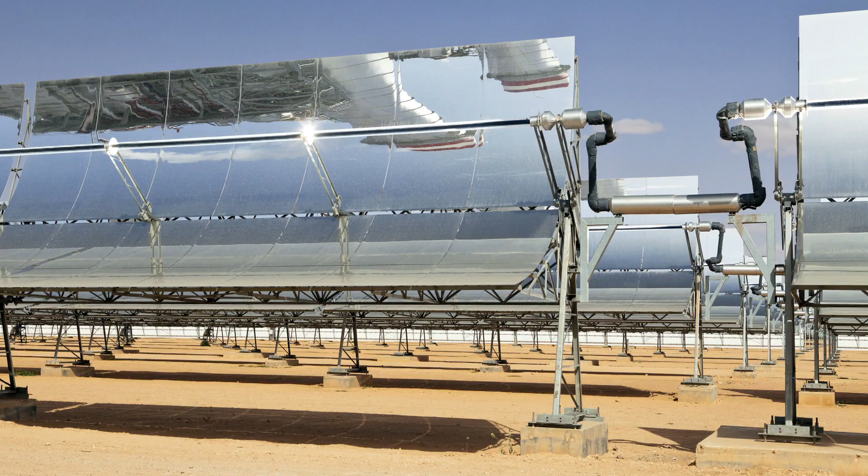The North African countries are economically emerging nations. Dynamic population growth associated with rising living standards and higher incomes has led to a significant increase in energy needs. Most electricity is currently produced from coal and gas, but solar power is set to become increasingly important in the future. In addition to the large-scale solar power stations envisaged in the Moroccan Solar Power Plan, in this region of plentiful solar resources, a multitude of small solar installations will also have a major role to play.

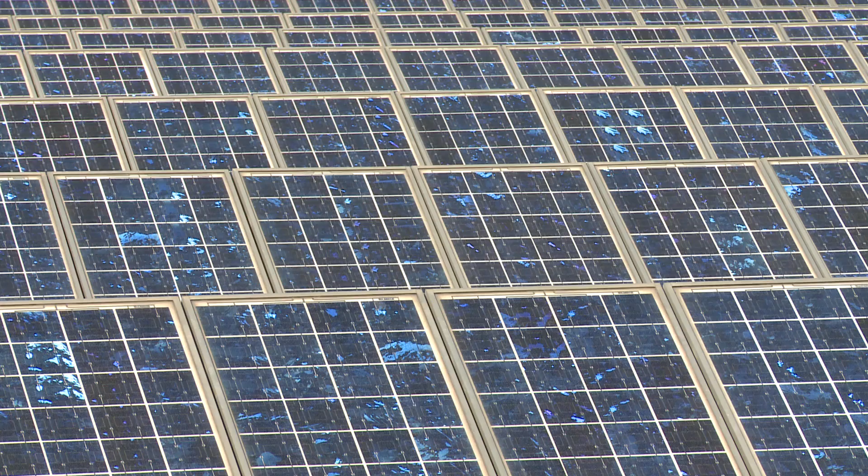Households, businesses and public authorities will be able to produce their own green electricity thanks to photovoltaic systems installed on their buildings. Many people already have solar thermal installations to produce hot water, as can be seen here in Rabat, Morocco's capital. And the government is now paving the way for harnessing the potential offered by photovoltaic systems. The whole country can benefit from this. Solar power can contribute to reducing costly electricity and fossil energy imports and give Moroccan installers and other businesses the opportunity to invest in promising technology which will create jobs nationally.

ADERE, the Moroccan Agency for the Development of Renewable Energy and Energy Efficiency, is tasked with promoting renewable energy, energy saving and energy efficiency in the Kingdom of Morocco. One of the activities that we carry out here, which is very important to us, is to show that the technology exists and that it can be used in Morocco. All those involved in construction, from the architect to the property developer, can come and see for themselves here on the roof of the ADERE office that these systems work and that the technology is increasingly reliable, very reliable in fact.

Solar power is a key asset in our quest for energy independence, environmental protection and energy self-sufficiency. And today's focus on buildings can be widened in the future to embrace many other applications. This film will take us through the installation of a photovoltaic system by the company AS Solar, showing the different mounting systems available. This installation was financed under the Solar Roofs program implemented by the German energy agency Deutsche Energieagentur, DENA.

Morocco is a country with plentiful solar resources and a very long coastline. Because of its proximity to the sea, the country's capital Rabat is often buffeted by strong winds. This factor must be taken into account when mounting solar power systems and, of course, at the planning stage. Thanks to a modern software application, the whole solar power system can be sized and optimized down to the last detail. In no time at all, the components are all ready to be transported to the installation site.

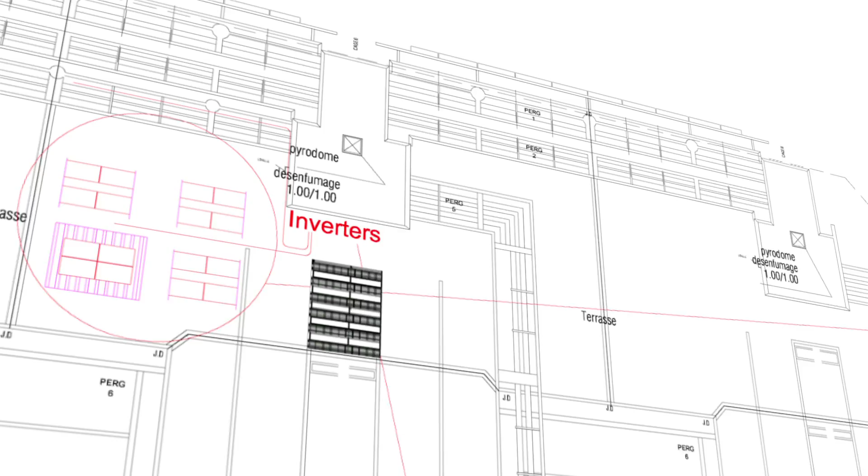In this case, the installation site is the new headquarters building of ADERE, the Moroccan Agency for the Development of Renewable Energy and Energy Efficiency in Rabat. The administration building has large areas available on its roof and walls, making it the ideal place for the demonstration of different types of photovoltaic modules and mounting systems. For almost every type of rooftop mounting, there is a specific system that ensures the safe and professional installation of all these valuable PV modules.

Given that a high-quality PV system has an expected lifetime of over 30 years, at the planning stage, it's essential to make sure that all the elements will be able to withstand climatic and environmental conditions for that length of time. It all starts with the mounting system. Skimping on this item to save money is the wrong way to go. In fact, compared with the cost of the modules and the inverters, the cost of the support structure is minimal.

The main challenge here is to design a high-quality static support structure capable of withstanding the violent winds that can affect the region. When planning a system that has to last 30 years, weatherproofing is an important factor to be taken into account. The parts used in most mounting systems are made of aluminium and stainless steel. If plastic parts are used, they must be especially resistant to UV radiation.

The type of roof where roof mount systems are most commonly installed in Morocco, both on individual dwellings or blocks of flats, is the concrete flat roof. Let's now look at 3 examples of modern photovoltaic systems adapted for placement on flat roofs.

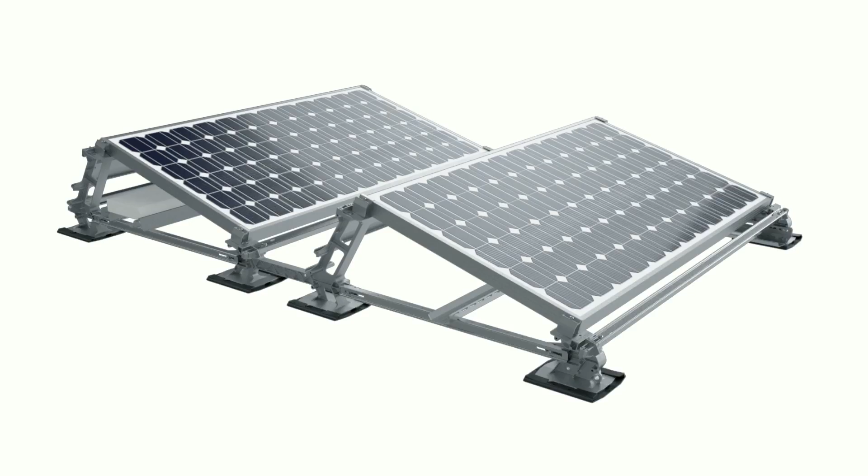Particularly noteworthy are the aerodynamically optimized photovoltaic systems specifically designed for flat roofs. They don't need to be secured to the roof, and ballasting requirements are low. Generally, wind loads acting on the surface of the modules generate uplift forces. In ordinary installations, this pressure has to be countered by significant ballasting or mechanical attachment to the roof, which means penetrating the roof covering.

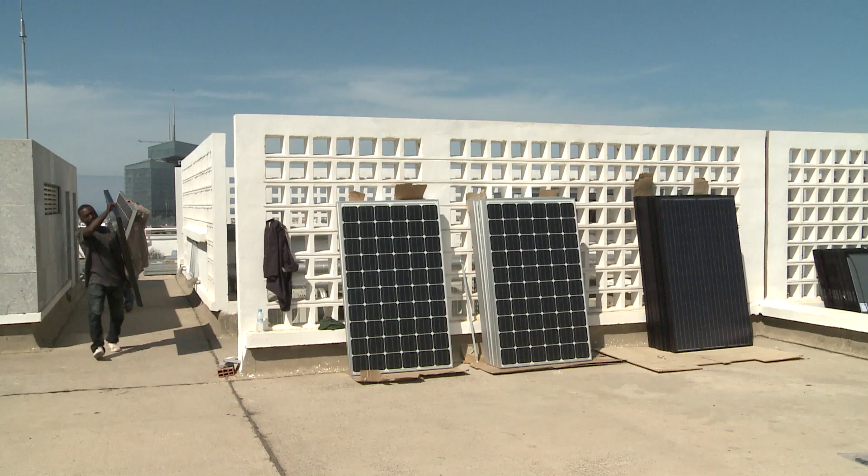These systems, which have been in use in Germany for a long time now, are based on an aerodynamic principle similar to that employed by a car spoiler, the flap fitted to the back of a car to reduce lift. It's important to follow the manual closely step by step. The solar modules must be moved and mounted carefully. Care must also be taken not to step on the solar modules or place or drop anything on them.

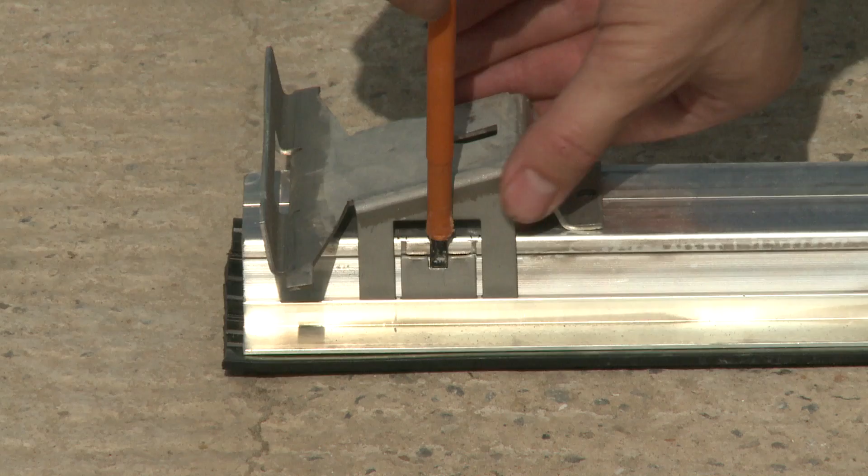Here is the Schletter AluGrid mounting system. First, the mounting rails are put in position. The fastening clamps onto which the modules will be fitted are simply snapped into place on the base rails. One of the advantages of the AluGrid mounting system is that installation is virtually tool-free. The special fastening clamps are secured by firmly clicking them into place and can easily be removed with a screwdriver should they need to be moved.

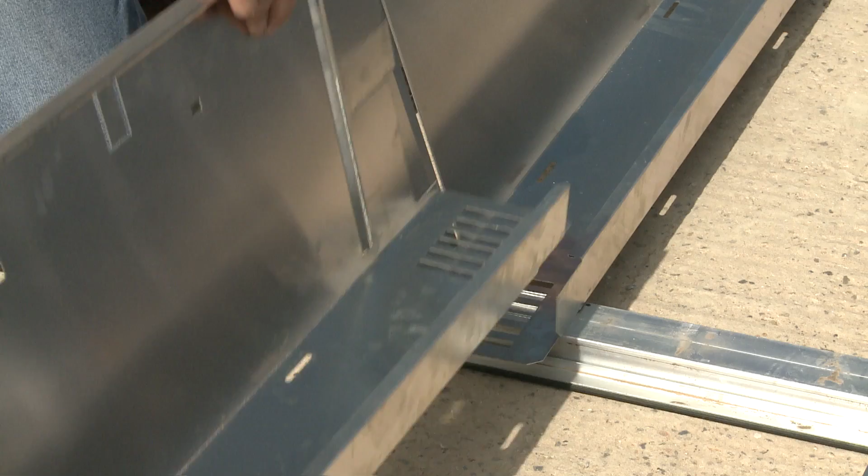The fastening clamps and cross rails, which can be adjusted individually along the base rails, are positioned at intervals calculated beforehand to avoid module shading. The wind deflector is then fitted to the back of the rack and is securely attached to the rails using fastening clamps. The module can be tilted by either 10 degrees or 15 degrees. The wind deflector sheets can be joined to each other using connector plates.

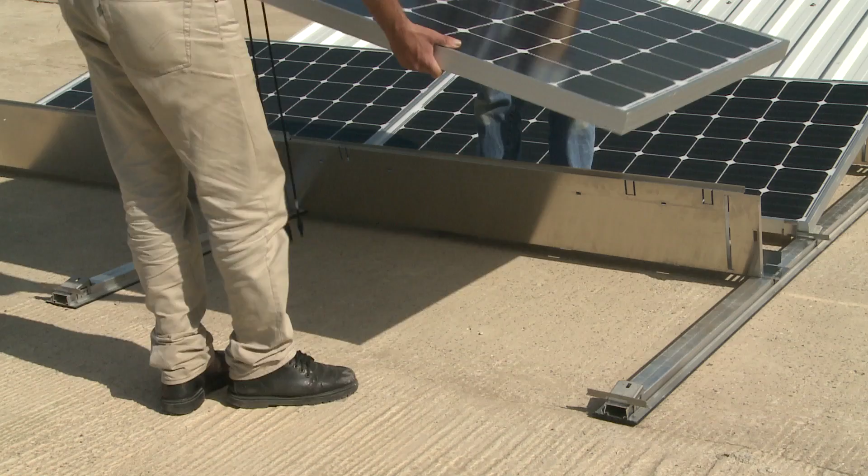The lower edge of the solar modules is placed on the cross rails and securely attached using fastening clamps. The same procedure is repeated for the top edge, which is secured to the wind deflector. Lastly, the metal tabs are bent around the module frame so that the wind deflector is secured in place to achieve the spoiler effect mentioned above. The special clamping pliers supplied with the kit must be used to tighten the module fastening clamps.

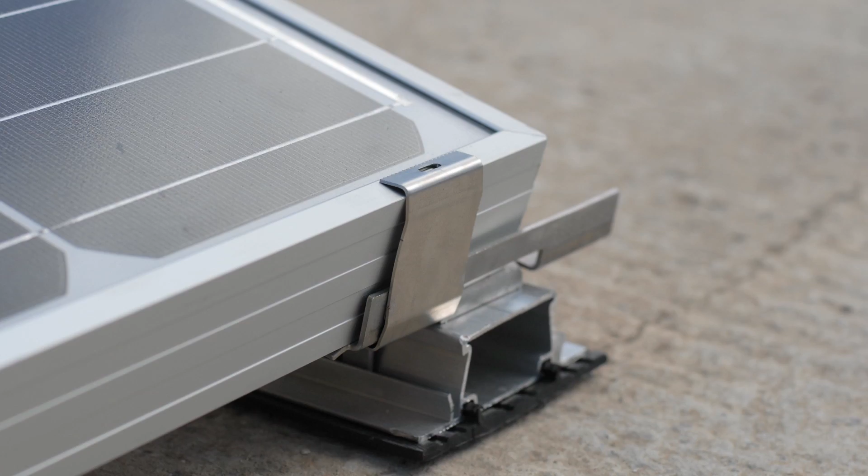The cable clips are fastened to the wind deflectors. The stones supplied with the kit are then placed in position as shown in the ballast plan.

The MSP FR mounting system developed by the company Hilti is also an aerodynamically optimized solution in which ballasting requirements to reliably secure the system are low. The slightly raised structure with a wide base has the advantage of permitting generous airflow under the modules to dissipate heat and of preventing the accumulation of water in the event of heavy rain.

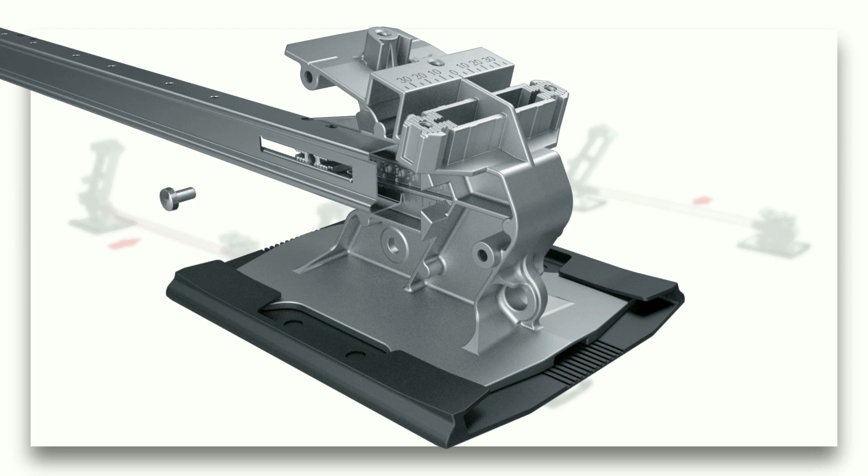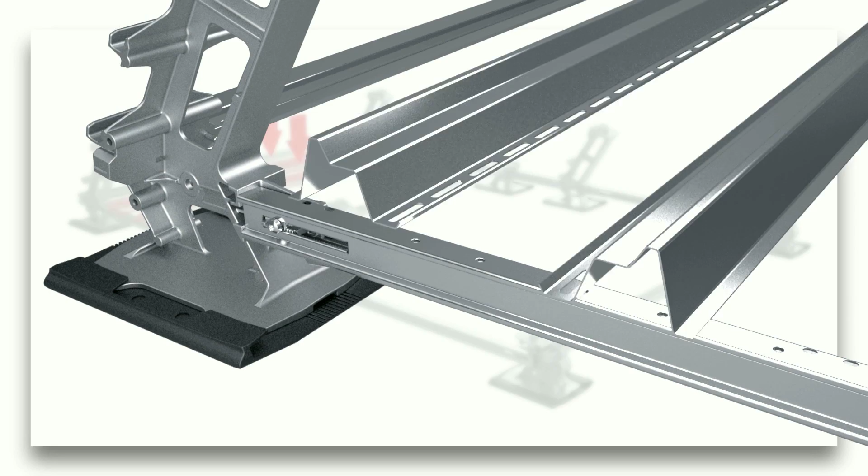The first step, as always, is to position all the parts on the rooftop and screw them together. The rails supplied are secured to the feet using the appropriate screws. It's important to always use the screws specifically indicated for each part as set out in the manufacturer's manual. All screws must be tightly fastened. During this assembly process, it's important to ensure that the feet and connectors are correctly spaced as shown in the instructions. Along with the standard rails, ballast trays are also fitted.

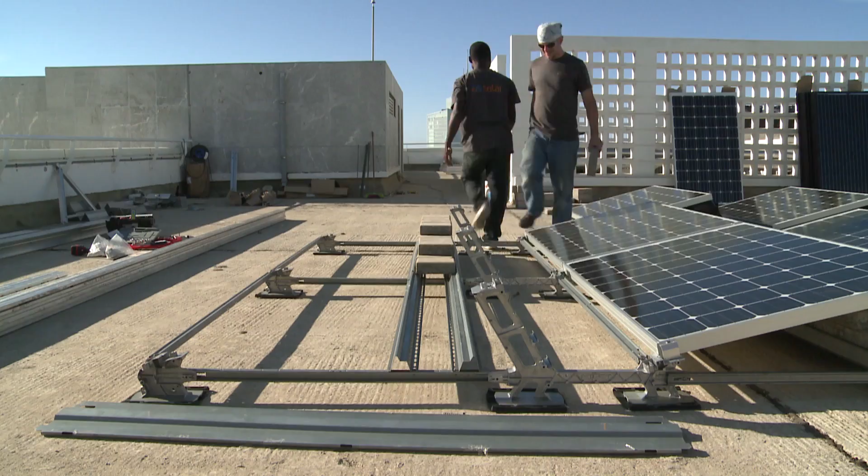Weights, such as bricks, are placed on the ballast trays to weigh down the structure as required. The exact load can be determined by consulting the site-specific ballast plan supplied with the kit. The modules can then be mounted and secured using the special module clamps.

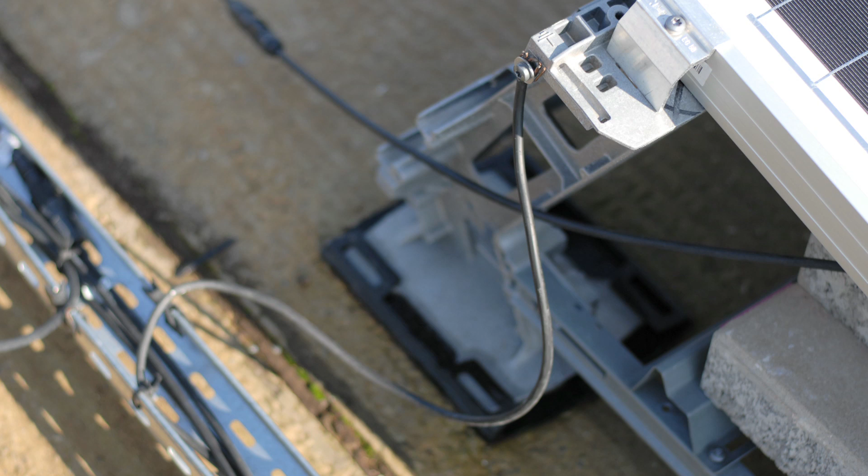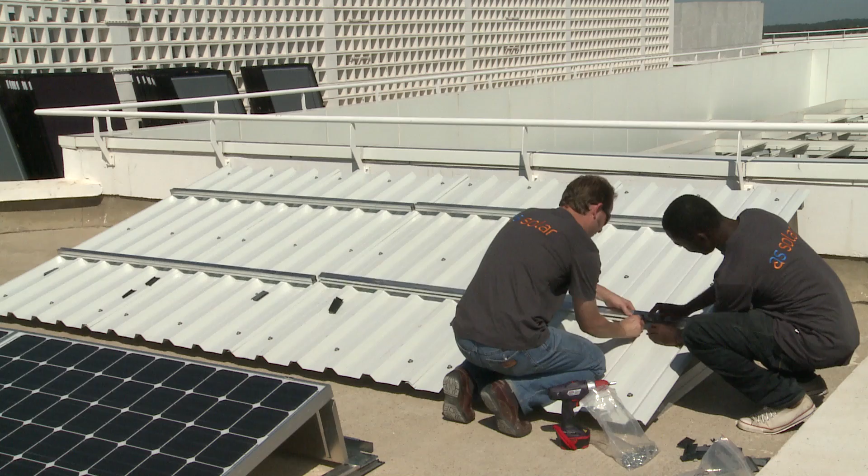In Morocco, as well as the large number of flat-roofed buildings, there are also many buildings, particularly industrial warehouses, with corrugated or trapezoidal sheet roofs. For this reason, let's look at a mounting solution specifically designed for roofs of this kind that is optimal in terms of cost. First, the mounting rails are fastened to the trapezoidal sheet roof. This is done using the single-fix fastening system.

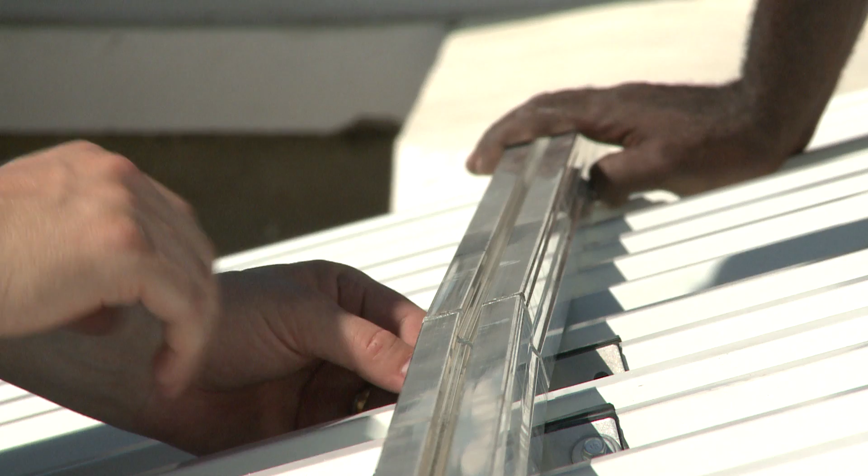The roof clamps are fitted by simply slotting them into the lower groove on the mounting rail in the required position. The single-fix fastening kit, specifically designed for trapezoidal sheet roofs, comes with self-tapping screws and sealing washers. The drillings made to attach the fastenings are made watertight as they are secured, thanks to the rubber lining inside the clamp and the sealing washer fitted with each screw, preventing any leakage through the roof.

When PV systems are installed, one of the factors to be taken into account is linear expansion. All materials expand when exposed to heat and contract when they cool down. The thermal expansion coefficient for aluminium is relatively high. Based on an empirical rule, an expansion gap of at least 2 centimeters must be left every 10 to 12 meters to allow for the expansion of the metal.

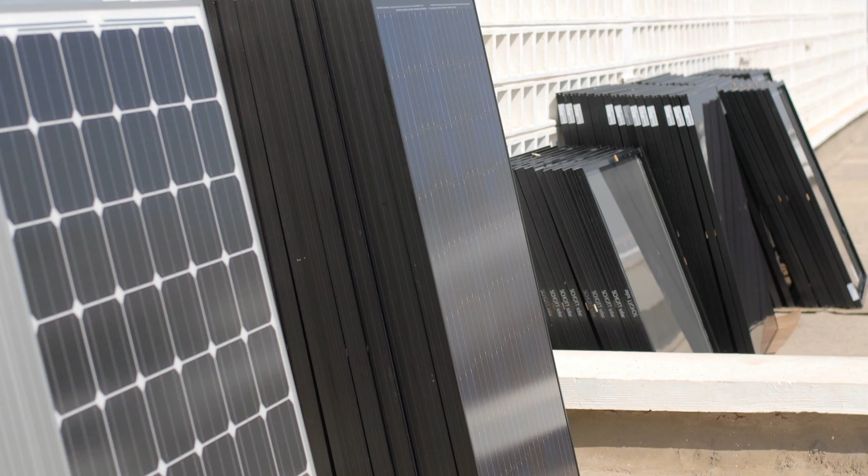The mounting kits are slotted into the upper groove of the rails at the required clamping points, serving to temporarily hold the square nuts in place. The solar modules can then be mounted. They are secured to the rails using the appropriate middle and end clamps. The free ends of the rails are then closed off with a plastic cap.

This mounting system is particularly suitable for flat roofs made of resistant concrete with sufficient static load-bearing capacity, as the system can be secured solely by ballasting. Attachment to the roof is not essential, avoiding damage to the roof covering.

The advantage of this type of mounting system is that it can be installed very quickly and easily. Furthermore, the system is totally flexible as each module is mounted on its own rack, making it relatively easy to change its position. This mounting system can be used on roof surfaces with a maximum pitch of 5 degrees and also on open ground. The first step, of course, is to determine module spacing to avoid any shading.

Bricks, concrete blocks and coarse gravel can be used for ballasting. Whichever is chosen, it's important to use the prescribed amount specifically calculated for the site in question. Once the plastic tray has been correctly positioned and ballasted, the PV modules can be mounted.

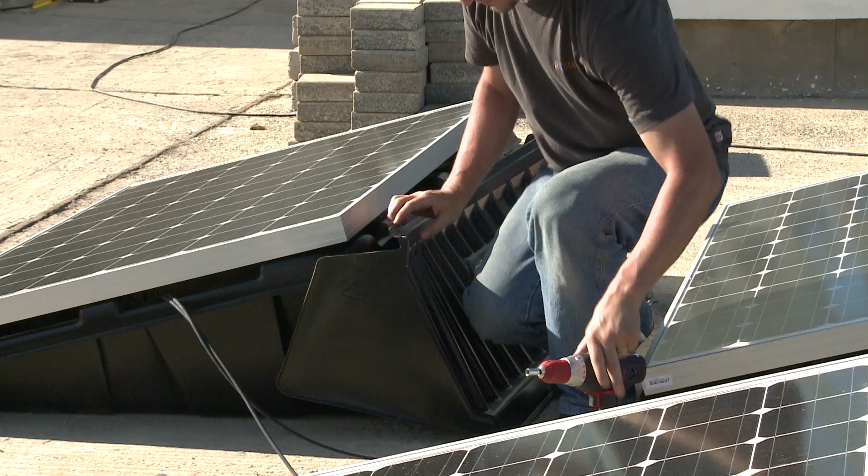Before the modules are mounted, 2 aluminium rails are fitted onto the back of the module and then secured to the plastic tray using clamps and screws. Lastly, the Console Plus rack is fitted with a streamliner, a back cover that acts as a wind deflector to reduce wind loading.

Rooftops are not the only option for the installation of photovoltaic systems for the production of electricity. If the roof area is too small, solar modules can also be installed on the walls of buildings. Ideally, the wall should be south-facing and not overshadowed by any nearby buildings or trees. The photovoltaic modules can be installed parallel to the wall or tilted to the optimum angle.

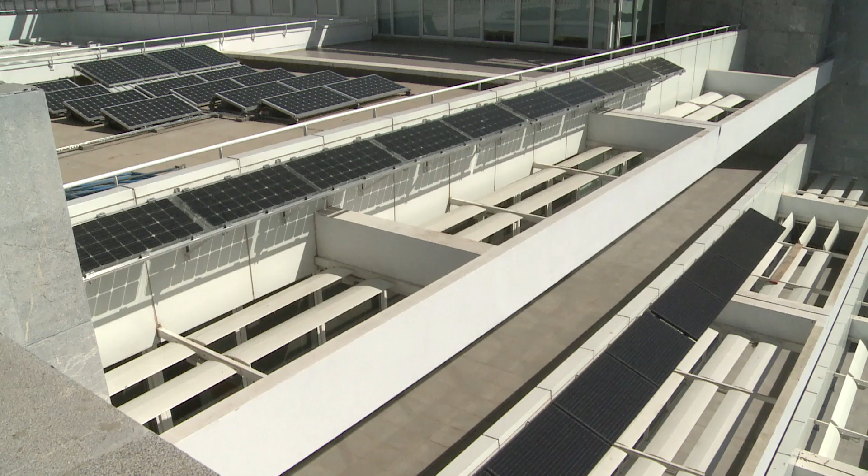When choosing the mounting system, static data must be taken into account, as the forces acting on the modules will undoubtedly be transmitted to the wall of the building. We can see now an example of how the mounting process can be carried out. Triangular supports are secured to the outside of the building at the points indicated in the mounting instructions.

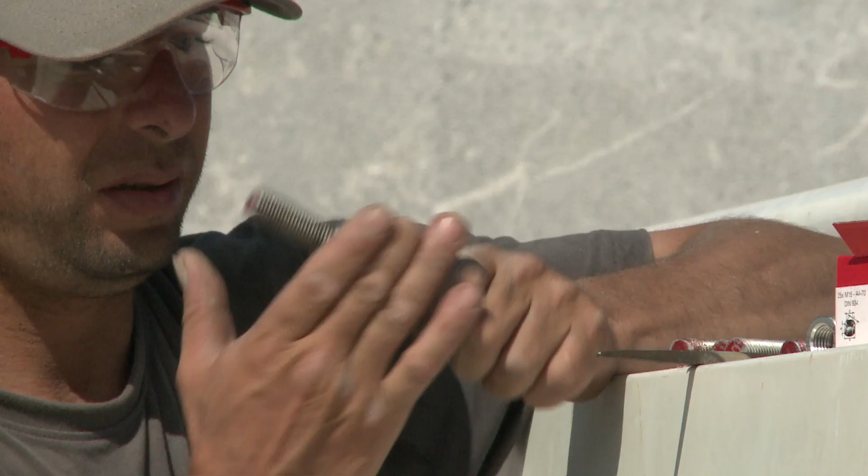Deep holes must be drilled into the wall for this purpose, because here too, the PV system may have to withstand high wind loads. In the case of clad walls, a hole must first be made in the cladding using a drill, through which the 4 holes required to mount the structure can be made with a hammer drill.

A 2-component adhesive is used here. First, all dust and dirt must be cleaned from the holes using a small manual air pump and brush. This is a very important step in the process, as it is the only way to ensure that the adhesive sets properly. Once the cleaning process has been completed, the adhesive is put into the hole.

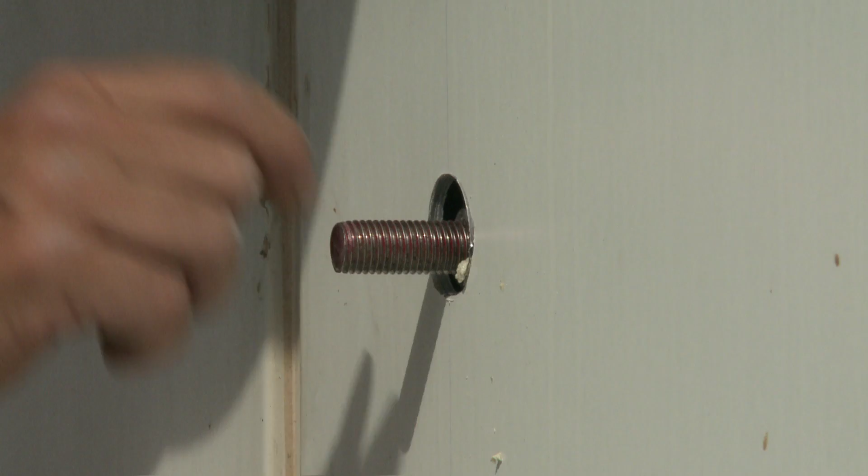A threaded rod is immediately inserted before the adhesive paste has time to dry. The triangular supports can now be directly mounted onto the threaded rods.

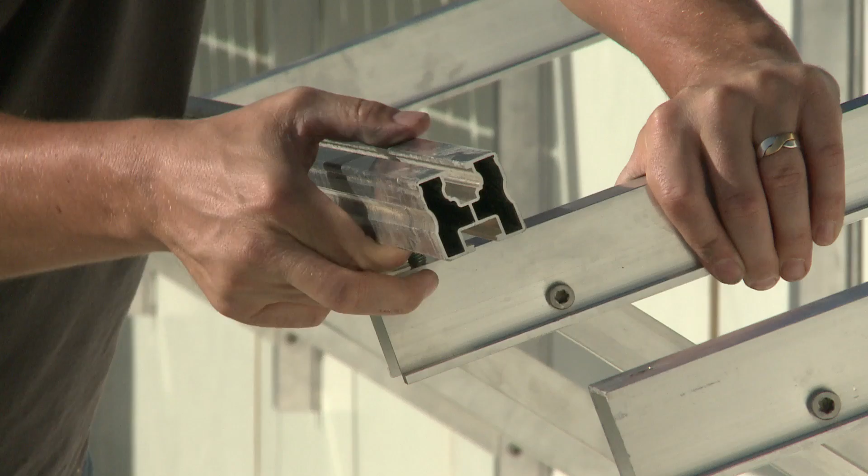The crossbars are then mounted, threading the screws through the slots to secure them to the triangular supports. The modules are mounted on the crossbars and secured using ordinary clamping systems. In the case of frameless glass solar modules, special clamps must be used to avoid breaking the fragile glass surface.

These laminate clamps are rubber-lined and should not be fastened too tightly. The open ends of the crossbars are closed off with plastic caps, as in the roof mounting system. If framed PV modules are used, care must be taken to ensure that the frames are grounded by creating a conductive connection between the frame and the rest of the mounting system.

In the case of Schletter mounting systems, the module frames are grounded thanks to special module grounding clamps. The clamp grip has 2 small metal pins that penetrate the fine anodized coating of the aluminium frame when the clamp is tightened, creating a conductive bond between the frame and the rest of the mounting system. A single middle clamp is sufficient to ensure the grounding of 2 modules at the same time.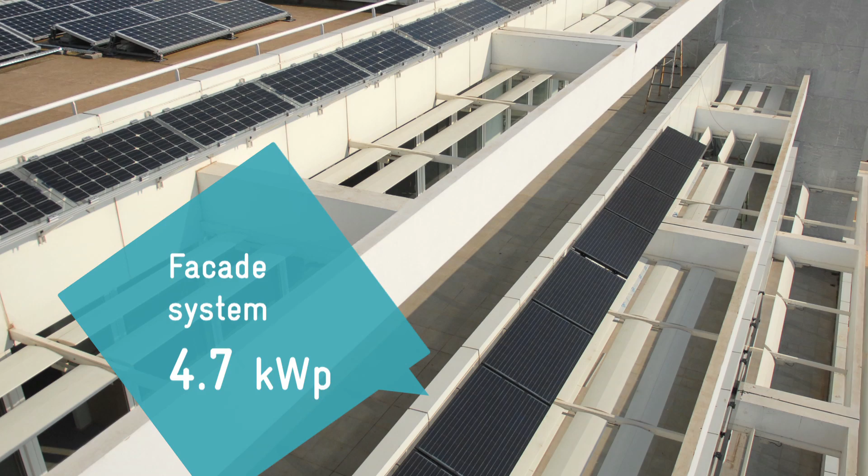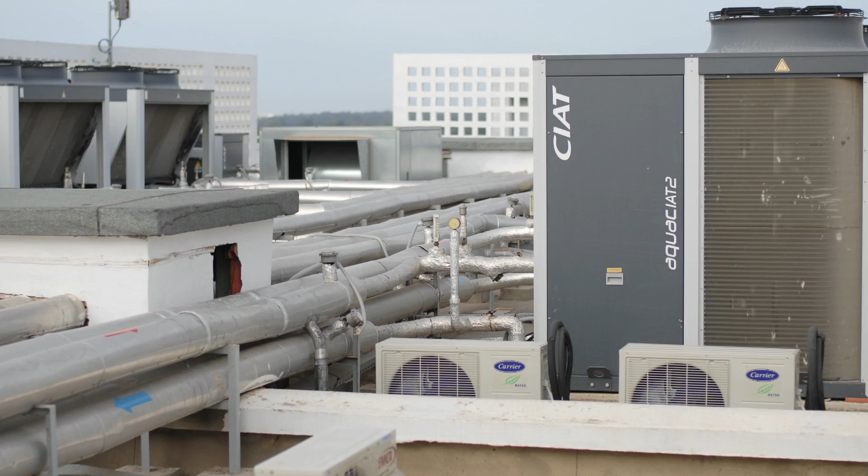In cases where the roof area is already occupied by other equipment, such as air conditioners, a PV array can be mounted on a raised support structure. One advantage of a pergola-mounted system is that it provides a pleasant shaded area underneath, which is a plus when the roof is used as a terrace.

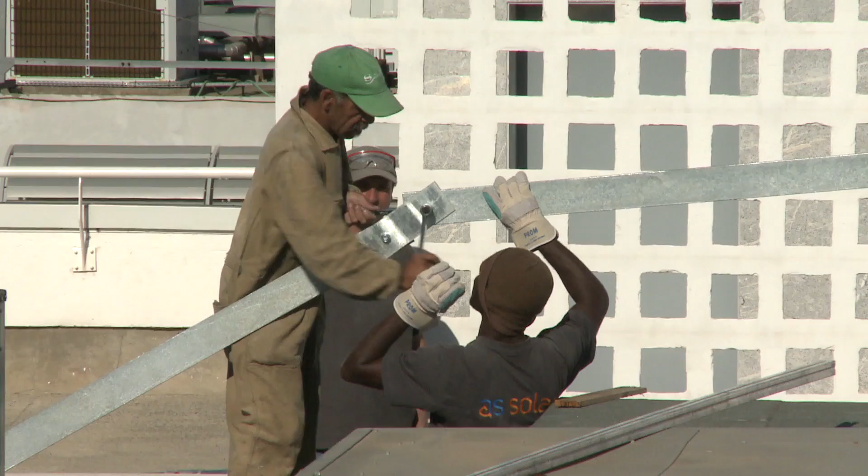This type of structure rests on poles made of zinc-plated steel. The lengthwise profiles are made of a special kind of aluminium, enabling them to span longer distances. In the preparatory phase, the lateral supports of the structure are attached to the supporting poles, and then the lengthwise sections are put in place. They are secured in such a way as to ensure the required stability of the structure.

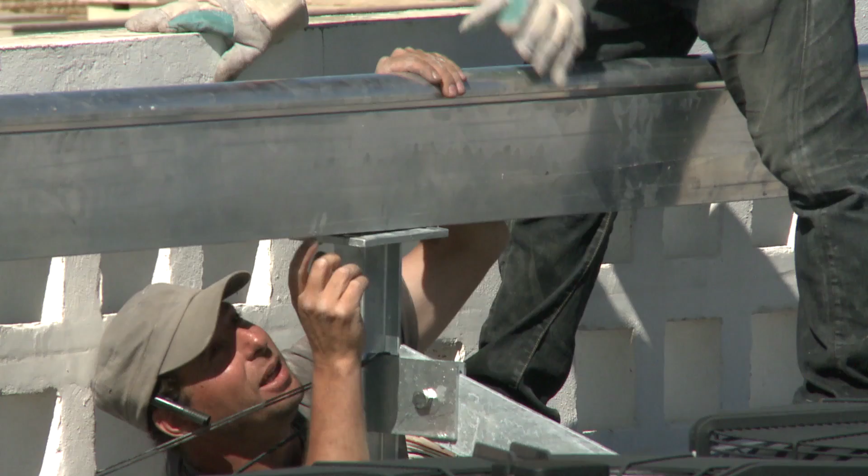The exact positioning of the supporting poles on the roof becomes clear once the support structure has been assembled, which is why it's not until this time that the poles are secured to the roof. The same procedure is used to secure each pole. 4 holes are made in the roof with a hammer drill, using the pole as a drilling template to ensure that the perforations are made in exactly the right place.

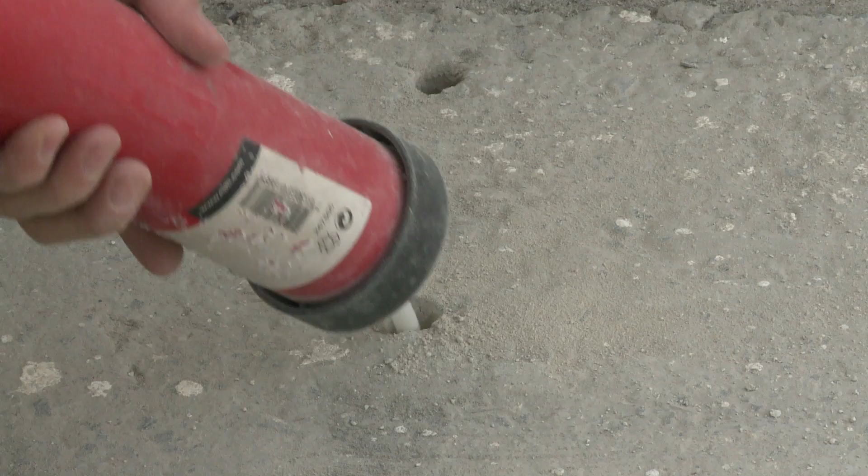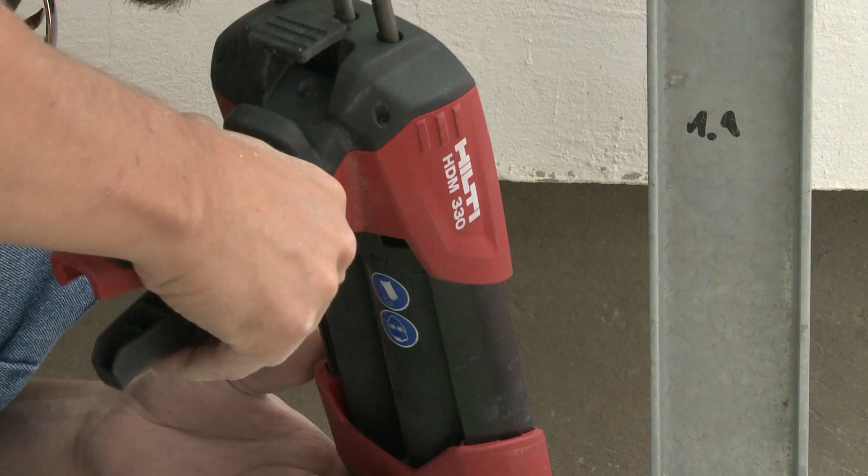The supporting poles are secured using an adhesive paste prepared by mixing 2 components together immediately prior to application. This way, wind loads are directed towards the roof and the roof surface is waterproofed. All drilling dust must be cleaned from the holes using an air pump and a brush, and then the air pump again. The adhesive paste is then placed inside the holes. Before it can dry, the lower ends of the supporting poles are secured using threaded rods and nuts.

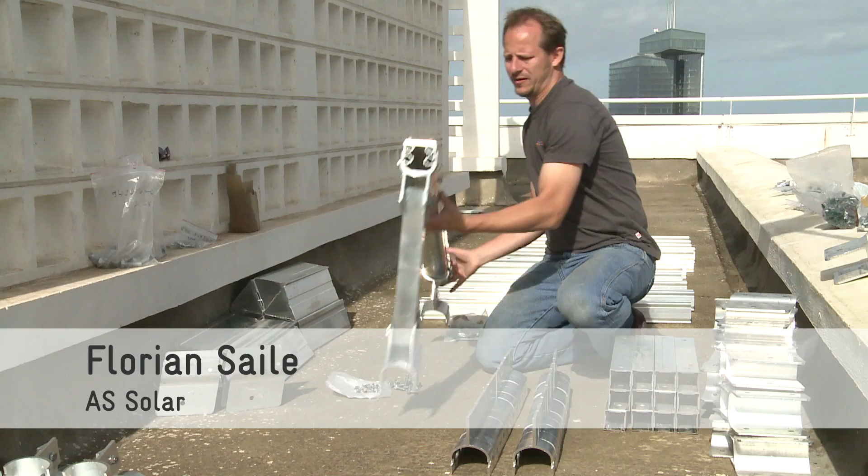Once the supporting structure has been erected, the isotop triangular supports are pre-assembled on the ground, where it's easier to work. Now we're going to assemble the triangular supports for our solar pergola. You can see them already mounted here, ready for the next step in the mounting process. We're now going to assemble them directly on the ground. You see, it would be more complicated to screw all the parts together up on top of the pergola.

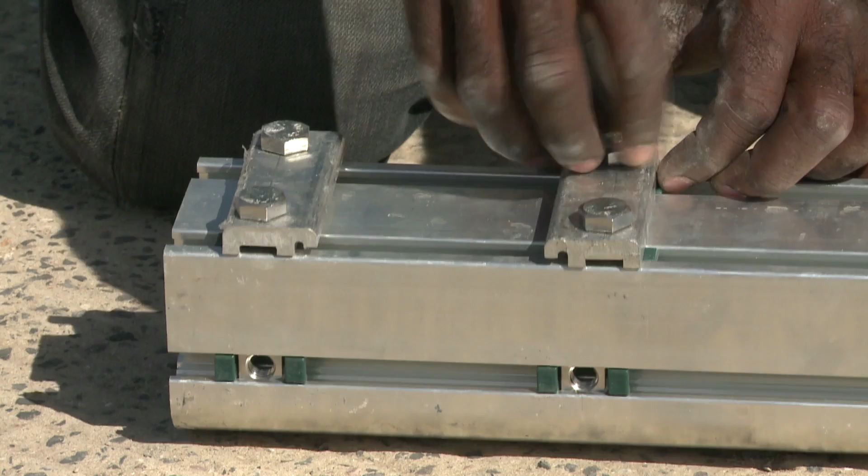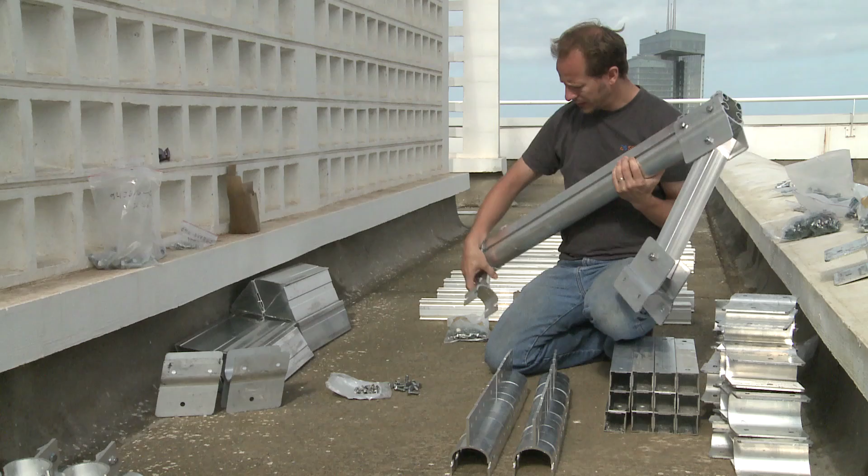There are lots of small parts involved too, so this job can be done much faster and much more efficiently on the ground. We've already assembled all these parts here, and we work as if it were an assembly line. There are 2 or 3 specific instructions that need to be followed here. The positioning of this part and that part. This support at the front is asymmetrical, so that it can be centered when it's assembled.

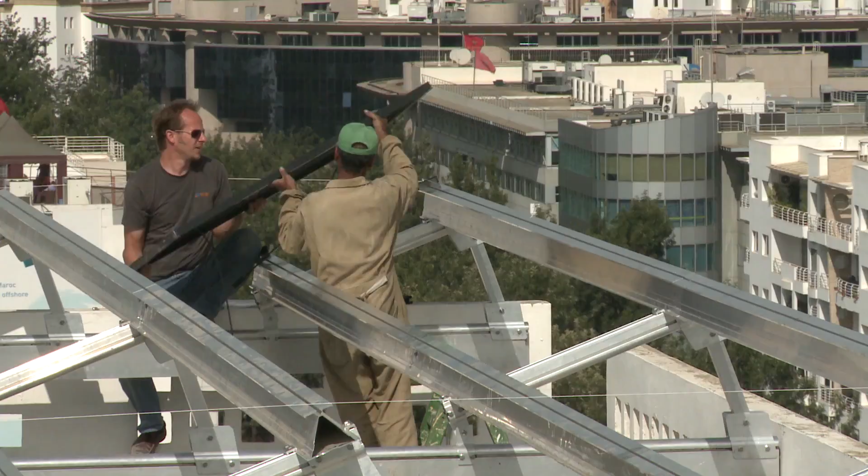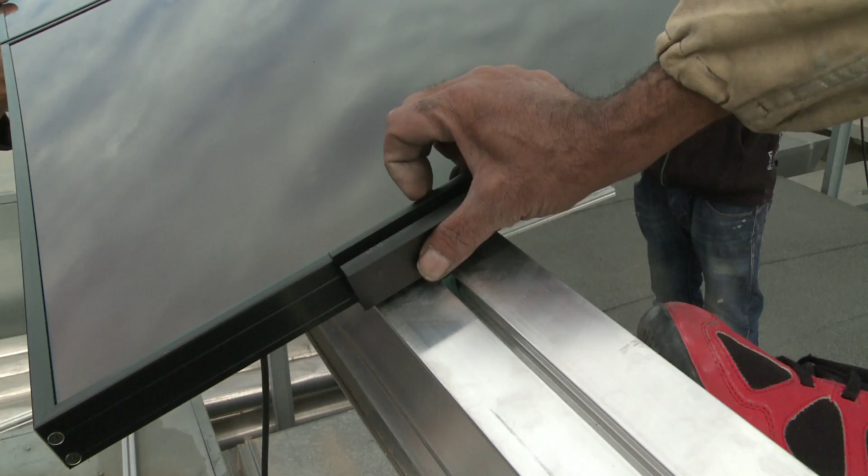Once all the triangular supports have been mounted, the crossbars are then secured. The solar modules are then directly mounted on these crossbars. The supports are assembled lengthwise using the corresponding fasteners and tightly screwed in place. Once the support has been secured, the thin film solar modules can be mounted. This is done using the same clamps as before. And again, in order to ground them, special grounding clamps are used with metal pins that pierce the anodized coating to create a conductive connection.

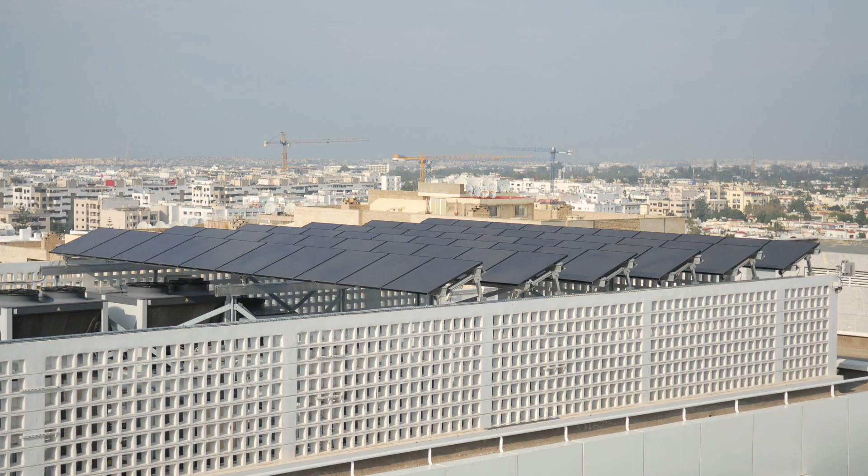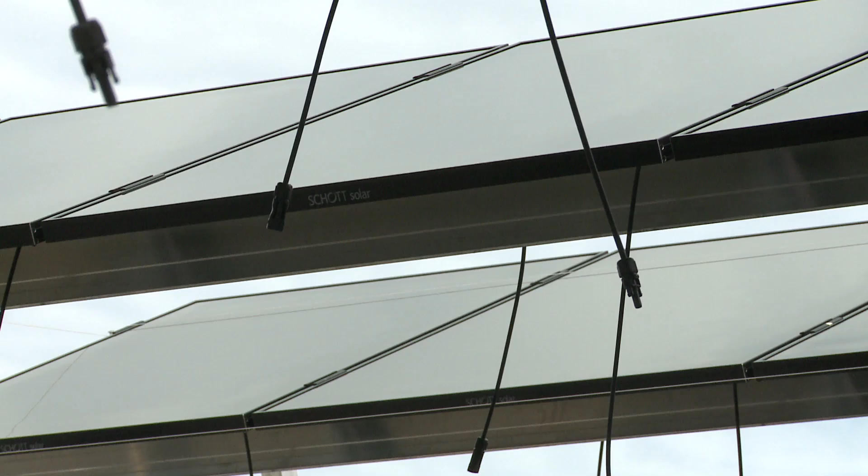When the modules are mounted, it is essential to align them in a perfectly regular layout in parallel rows. This ensures optimal use of the space available. Once mounted, the modules are connected to each other as shown in the mounting instructions to form strings.

When laying the cables and connecting them to the modules, it's important to ensure that the cables are not connected in conductive loops, with a view to limiting the risk of induction voltage peaks in the event of a lightning strike. The cable specifications stipulated in the mounting instructions must be strictly followed, paying particular attention to cable diameter. The positive and negative pole of each string is connected to the inverter via a connecting cable.

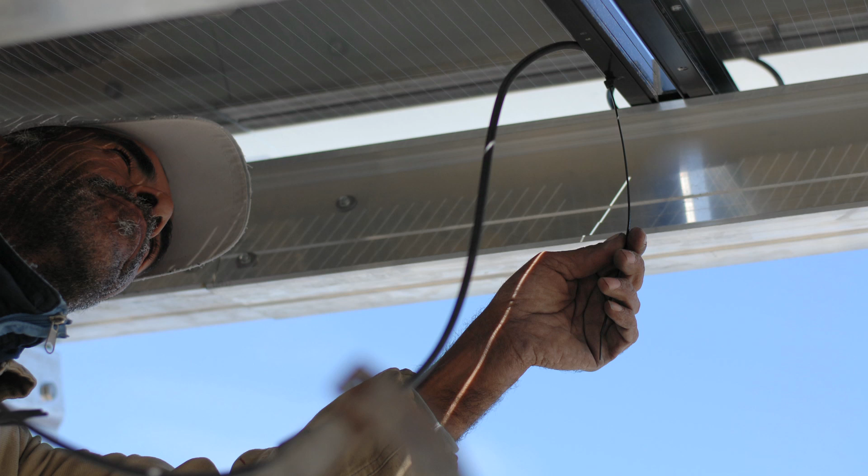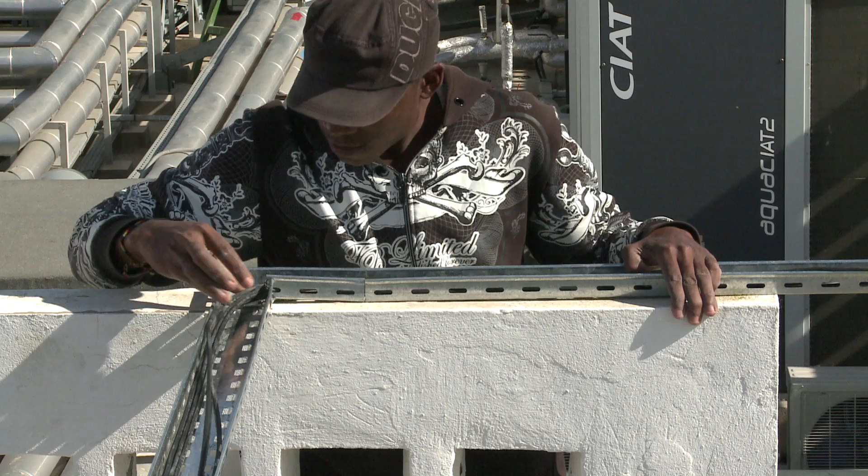When choosing the materials to be used for the installation, it should be borne in mind that PV systems have a long lifetime. Particular attention should be paid to the resistance of plastic materials when exposed to sunlight. For example, wiring should be carried out using special solar cables. This type of cable is specifically designed to be UV resistant so that it can withstand prolonged exposure to sunlight. It also has two insulating sheaths, and the core is formed by strands of tin-plated copper wire capable of withstanding up to 1000 volts.

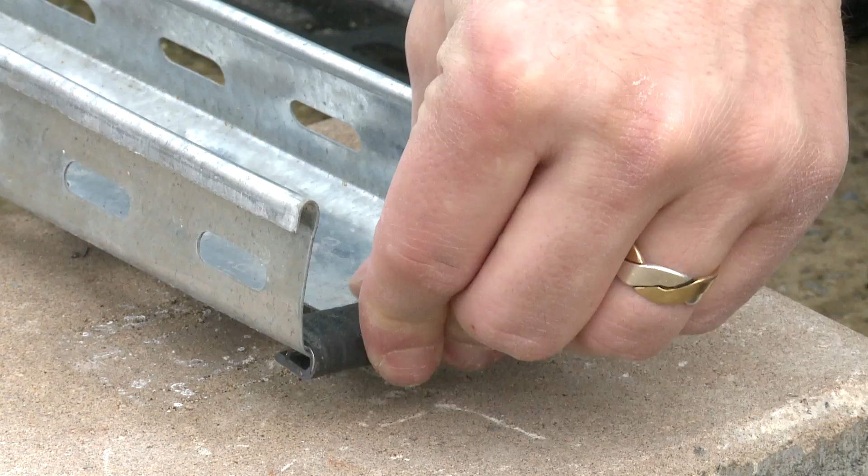To avoid damaging these protective outer sheaths, care must be taken not to route cables over sharp or protruding edges unless they are first fitted with edge protectors. All cables must be laid in the cable channel without applying excessive pulling force and taking care not to bend them beyond the specified minimum bend radius.

Additionally, in order to ensure that they last for their expected lifetime, all the cables should be tied together, particularly when they are fastened to the rack. Over time, cables can become worn if the effect of the wind causes them to rub against sharp edges. It is essential that any cable ties and clips used are also UV resistant.

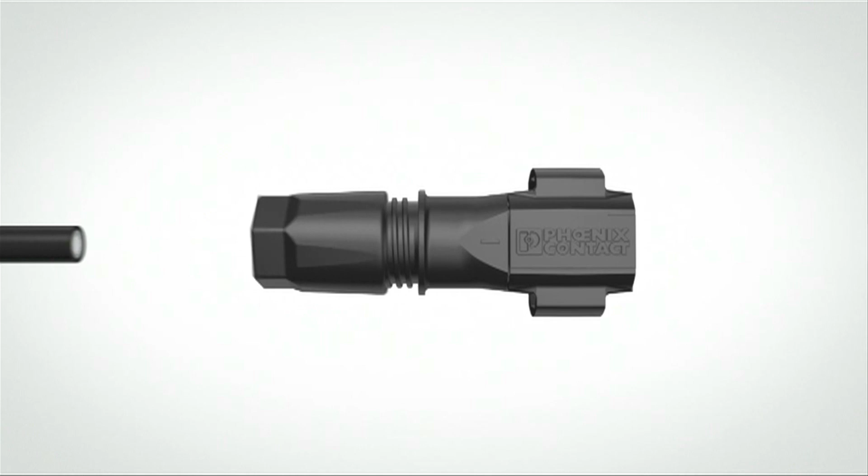For the wiring of a PV system, there are a variety of special cable plug systems that can be used depending on specific requirements. Cable plugs that can be installed without crimping tools are particularly practical. For the protection of both users and the installations, the entire structure must be grounded or connected to an equipotential bonding grid.

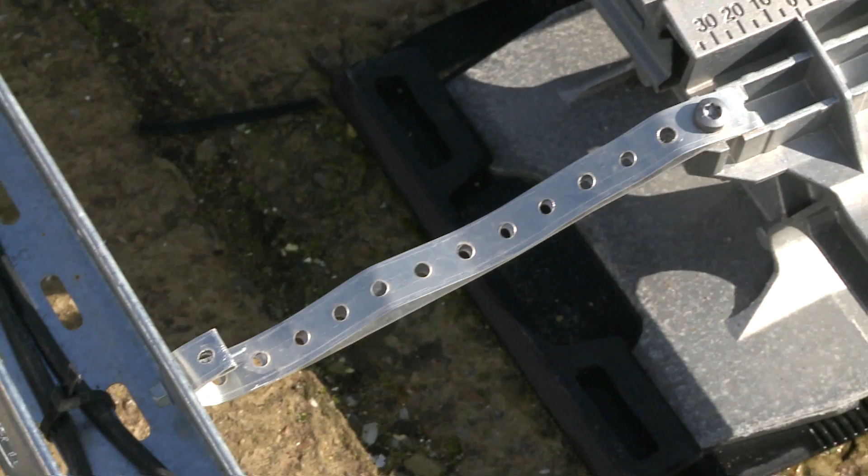For the grounding of different types of racks and modules, all the parts of the racks must first be connected to each other to ensure conductive bonding. A ground wire with a cross-sectional area of 16 square millimeters is then connected to at least one point on the rack. In order to avoid running too many ground wires from the roof to the inside of the building, it's recommended to bring all the cables together on the roof and then run one wire from that point to the building's ground connection.

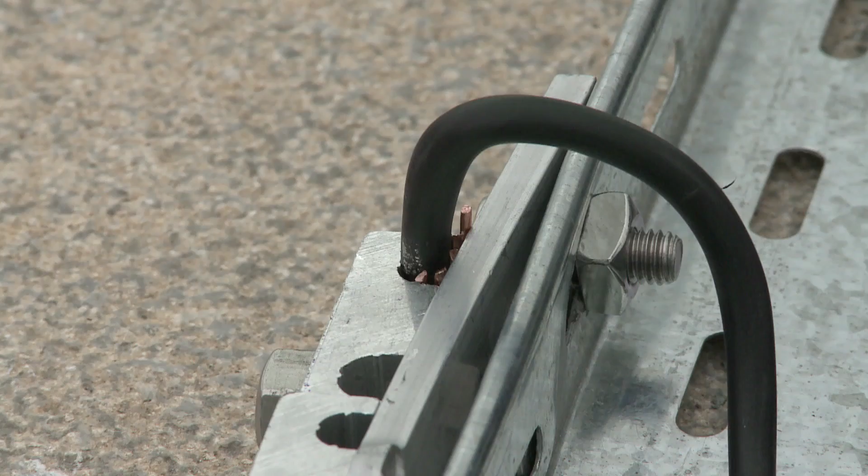A special bus bar has been used to ground the installation, bringing together the ground wires from all the devices and all the metal racks. To check that the grounding system meets local technical regulations, an electrician has to take the required measurements and record them on a certificate.

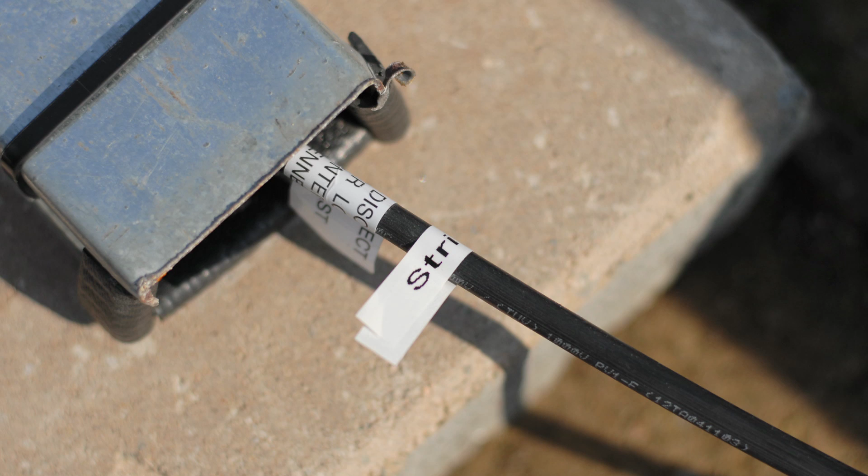To prevent any wiring errors and to facilitate system maintenance by the operators who will eventually be responsible for operating the system, it is essential for all cables to be carefully labelled. With outdoor installations in particular, it's important to use lettering that will remain legible for a long time, even when exposed to the elements. To prevent mislabeling, it's recommended to label each cable as it's laid. All the modules are now firmly secured and correctly wired.

The next step is to install the power electronics and hook the system up to the electricity grid. Inverters are required to convert the direct current produced by the PV modules into an alternating current which can be fed into the electricity grid. The inverter must be compatible with the photovoltaic modules in terms of its technical characteristics and the way the modules are interconnected. First of all, it's necessary to decide on the best location for the inverters.

Most high-quality inverters are designed for use with equipment with a high protection rating, such as IP65, and can therefore be installed outdoors without any problem. However, it's recommended to hang the inverters in places that are as cool as possible so that they can dissipate the heat that they generate. Well-ventilated, shaded locations are recommended.

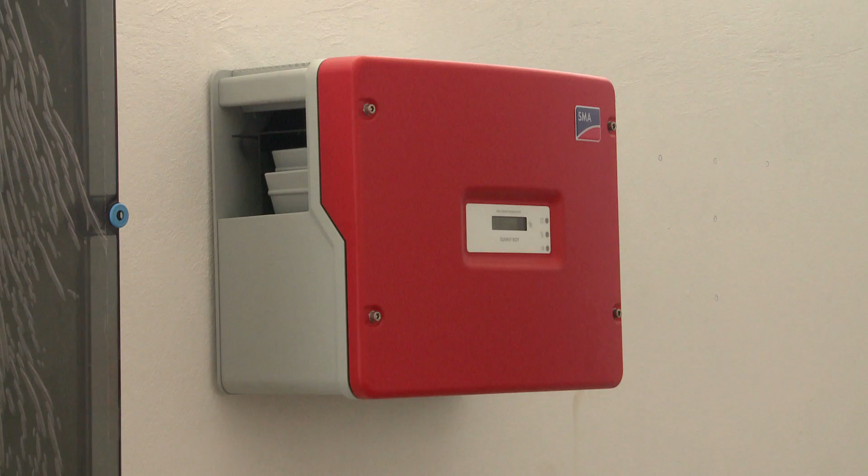When hanging the inverters on a mounting bracket, it's important to comply with the clearance requirements stated in the mounting instructions. Room must be left at either side, 30 centimeters for example, so that the inverters can expel hot air from the sides. A further 50 centimeters clearance should be left underneath the inverter, simply to ensure that there is enough room to work comfortably and so that the cable running down from the inverter can be properly positioned.

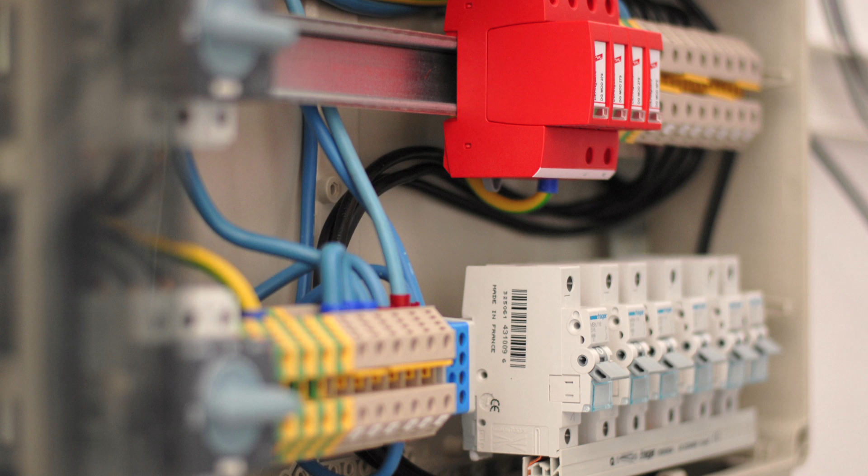The first step is to wire the inverter on the alternating current side. Each inverter must be fitted with an independent circuit breaker to protect against short circuits. The inverters are protected from voltage surges from the public electricity grid by installing a Type 2 surge protection device on the distribution board on the AC side. Surge protection for the photovoltaic installation must be adjusted to the building's surge protection.

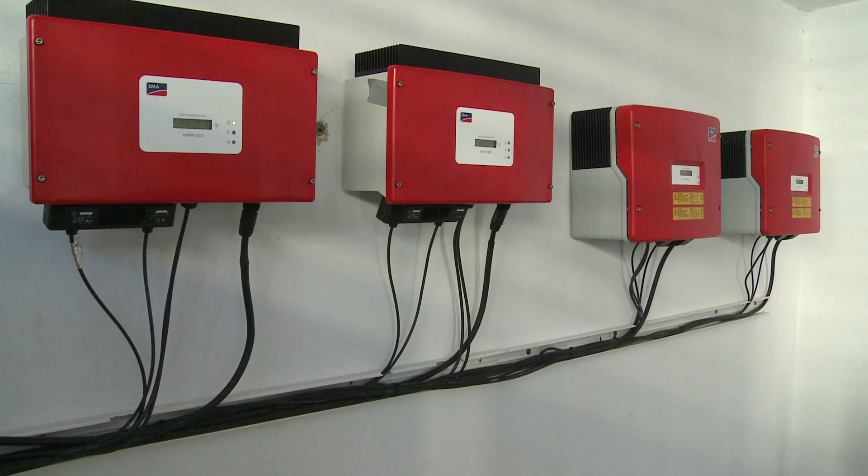Depending on the size of the photovoltaic system, when wiring, the inverter outputs can be regrouped in separate sub-distribution boards. When hooking up the grid, care must be taken to ensure that the load is distributed as symmetrically as possible for each phase. In the installation shown here, the outputs from 2 of the 6 single-phase inverters are brought together and distributed in one phase.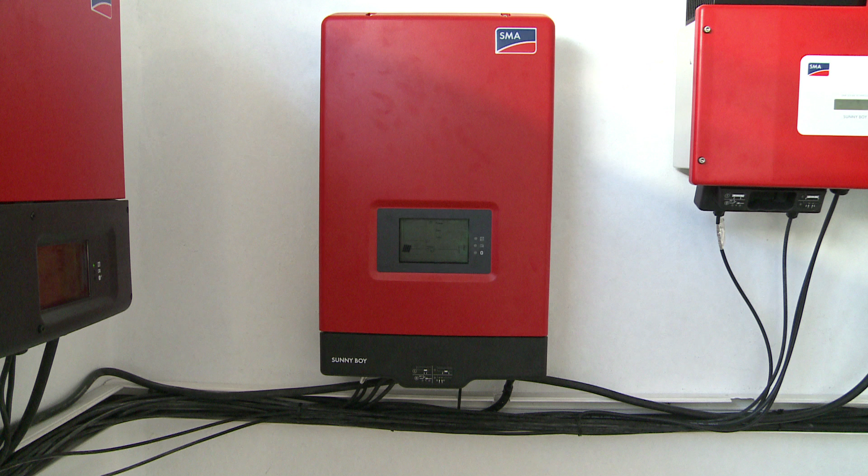When the wiring has been completed on the inverter side, the connection to the grid can still not be activated. It can only be activated after the DC wiring has been completed and the inverter is in operation. The next step is to connect the DC cables from the module strings to the corresponding inverters.

In order to protect the inverters and the domestic electricity network from possible damage to the PV system caused by lightning strikes, a Type 1 DC surge protection device with a lightning arrestor must be connected between the PV modules and the inverter.

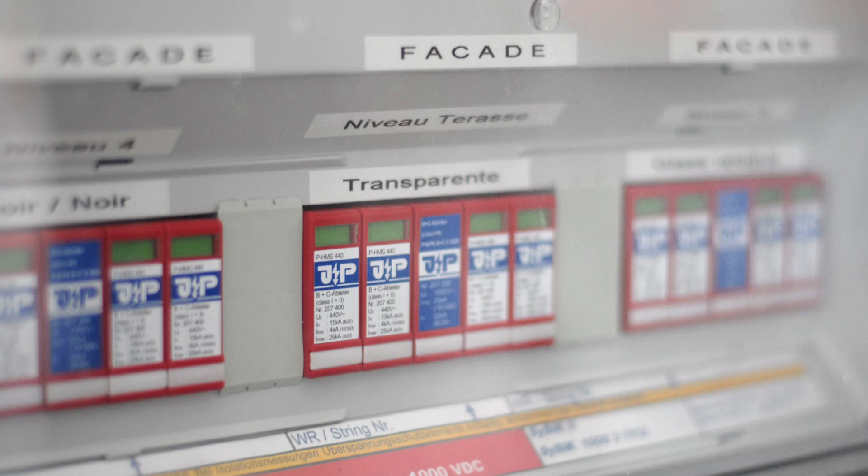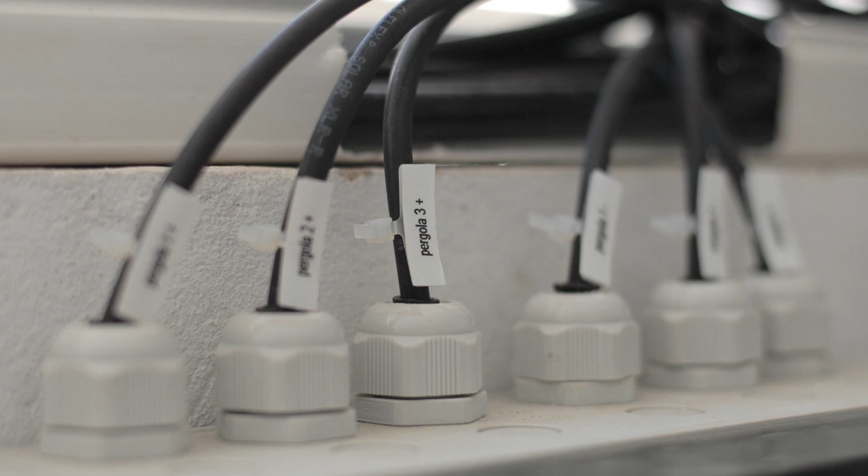Lastly, before the DC wiring is connected to the inverter, its performance must be checked again by measuring each string and verifying the polarity and voltage to ensure that they are correct. The voltage is correct when it corresponds to the number of modules connected in series. It is compulsory to record the values measured in the installation documentation. As with the outdoor wiring, the cables of the distribution boards and those connected to the inverters must be labelled.

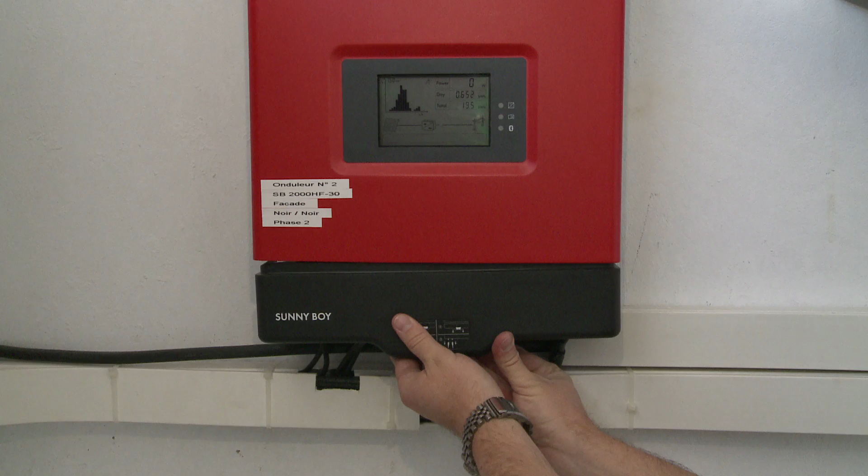Only when everything has been checked can the integrated switches be connected, in the case of SMA brand inverters, the ESS handle. After a brief automatic inverter system check, the inverters start working. 93 Volt. At this point, the inverters can be connected on the AC side. All the important parameters will then come up on the electronic displays.

There is another important safety warning to be heeded at this stage. When carrying out any maintenance work on the electric system of a PV installation, the inverter must be disconnected. Opening the AC fuses alone is not sufficient because the DC side remains live.

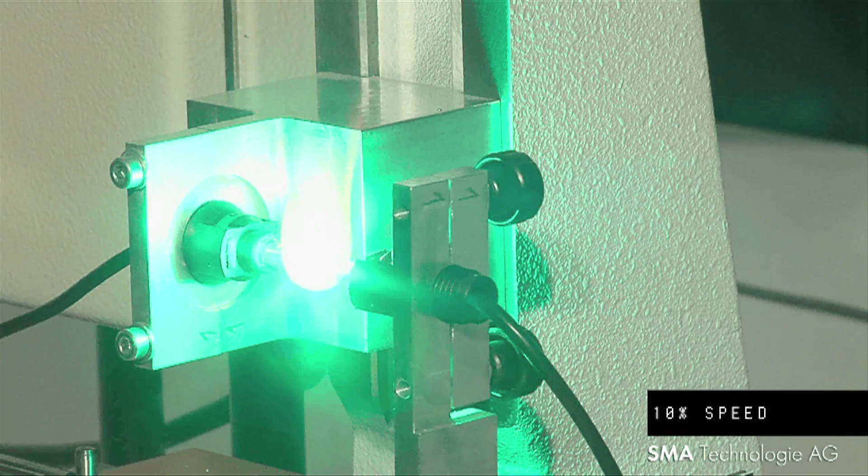Special care must be taken when handling the DC cables. They must never be unplugged when the system is live. Very high voltages can cause arcing, as seen in this laboratory test. This is very dangerous for anyone working on the electric circuit and can damage the cable plugs.

A small weather station with a solar radiation meter transmits real-time meteorological data. Installing a weather station of this kind is useful, for example, for making an accurate comparison between theoretical data and real data for a PV system, to monitor performance and to provide documentation relating to the warranty.

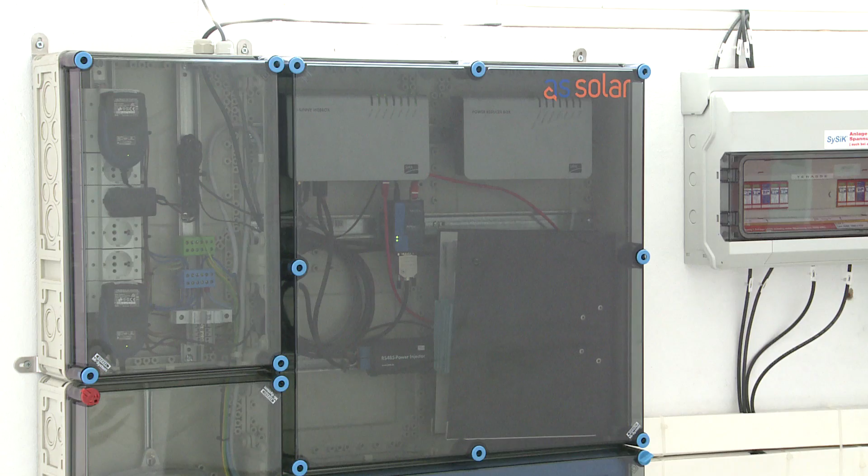If the system operator considers that the data shown on the inverter displays is not sufficient, the installation of a remote monitoring system is recommended. With this type of system, all the inverter parameters are displayed and can be consulted from anywhere in the world using the internet. The main purpose of a remote monitoring system is to display and transmit fault messages.

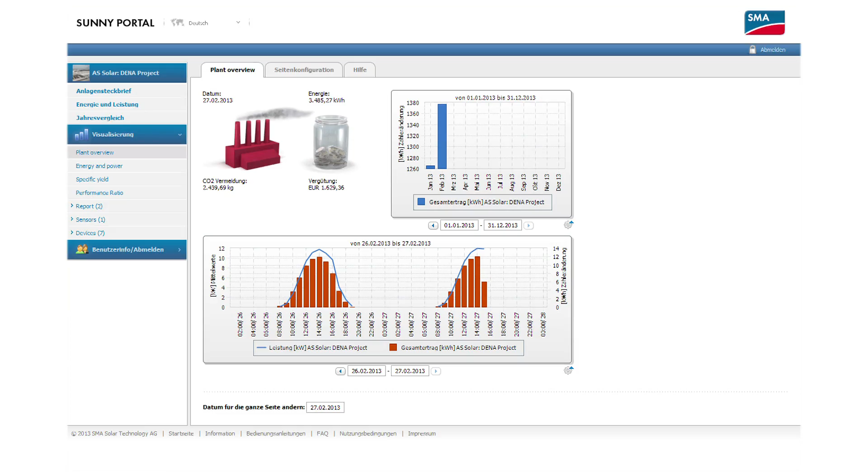It is not so easy for an operator to notice that one of the inverters is malfunctioning and has stopped feeding power into the electricity grid because they work noiselessly and are often located separately in a service room. Such a system is obviously of great interest in large-scale PV installations because larger investments are involved.

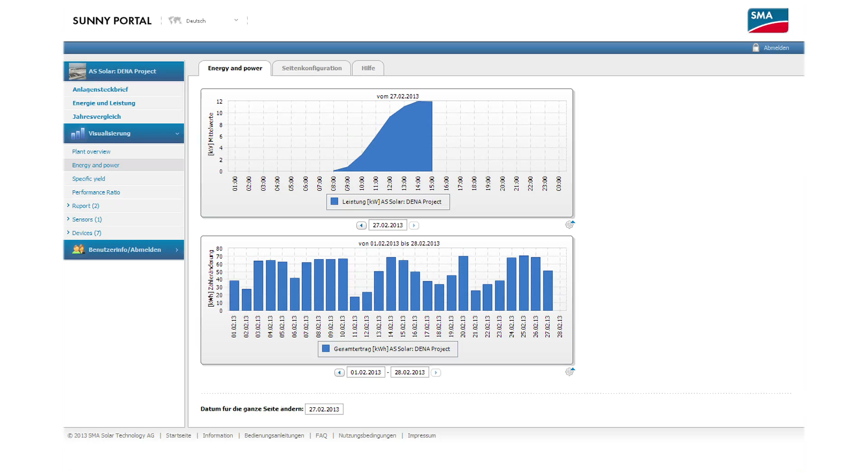In the event of a failure, fault messages are sent by SMS and email to the operator or maintenance company responsible for the system, who can then go to the site and resolve the problem. A remote monitoring system also provides a number of other functions and options. For example, the updated technical characteristics of the installation can be downloaded onto a smartphone.

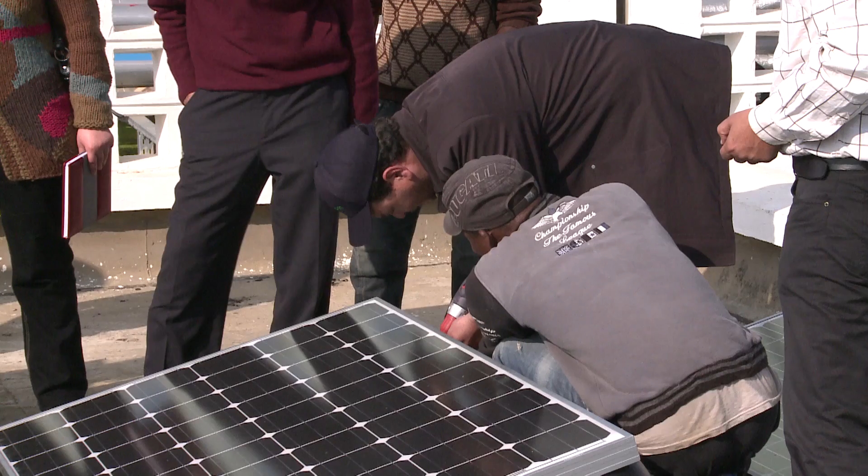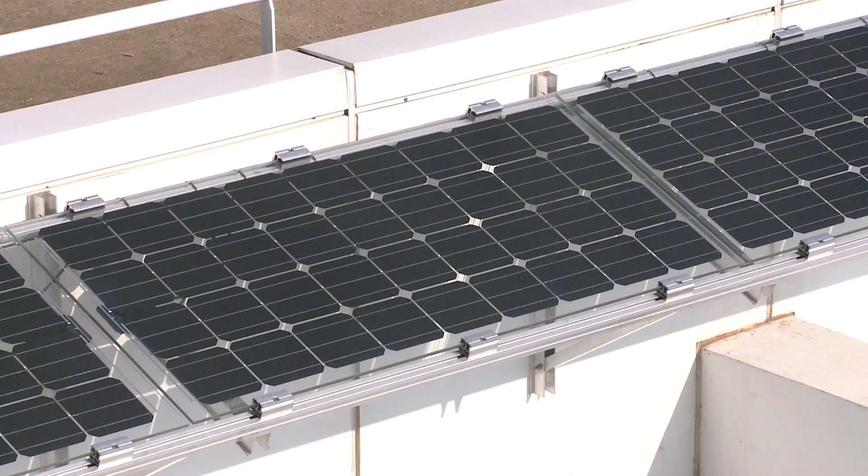Particularly in countries with plentiful solar resources like Morocco, photovoltaic energy is one of the main alternatives to conventional electricity production. Solar power is clean energy and is available in virtually limitless quantities. The conditions now in place for feeding photovoltaic power into the public electricity grid have broadened the outlook considerably. This new framework is opening up the photovoltaic market and providing significant growth opportunities for small grid-connected systems, along with the creation of employment opportunities for well-trained people.